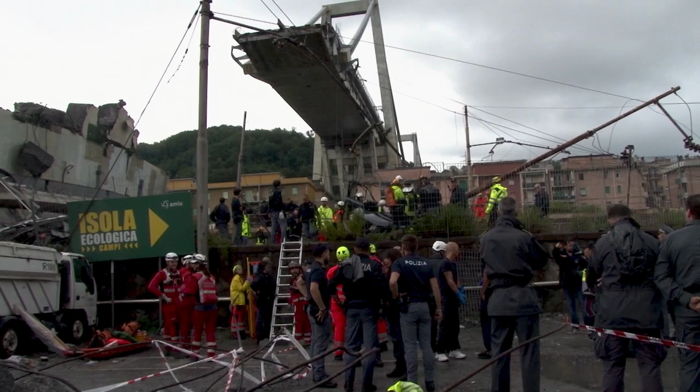It is the worst road disaster in Italy's history. The tragedy has left a deep scar on the nation and on the city of Genoa, despite an incredible feat of engineering that stands both as a monument to the catastrophe and a symbol of pride reborn.

These images capture the last moments of the Morandi Bridge and of 43 people's lives. The brake lights of the vehicles on the bridge tell us there's a stoppage ahead. The traffic draws to a standstill, and the drivers realize what has just happened. The bridge has disappeared. A colossal disaster has occurred.

It was an avoidable tragedy, and that's why it's so painful, because they needn't have died that way. If I think of my nephew and niece, 12 and 14 years old, in the fullness of their lives, it's senseless.

Less than 2 years later, TV crews from all over the world have come to cover the opening of the new bridge over the Polcevera River. The new bridge has a name, Ponte Genova San Giorgio. The highest institutional figures of the Italian state are present, as is Renzo Piano, the bridge's architect.

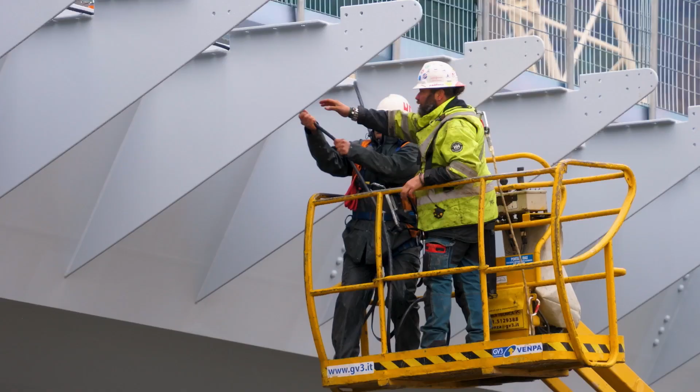The success in building the bridge is a symbol of how things can be done right, with quality, on budget, and above all, on time.

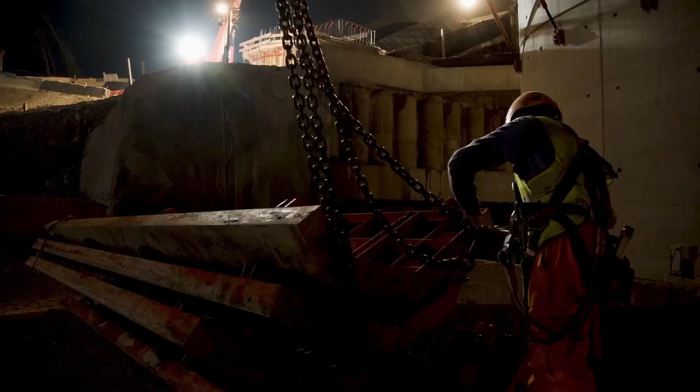This is more than a bridge. It is the symbol of national pride, the sign of the rebirth of a city struck by a massive disaster. The story of fortitude under the most trying conditions.

The new bridge is the nation's response to the disaster. It is the late morning of August the 14th, 2018. A massive rainstorm strikes the coastal motorway, as these images, filmed by a truck driver's phone, show. He is on his way to France.

Gianluca Ardini was delivering furniture in his van. At the wheel, his friend and colleague Luigi Matti Altadonna.

That morning in particular, it was raining hard, I remember. My colleague and I got into my truck to do some deliveries. I worked in a company that sells home furniture, so we start our day of deliveries, and we were at Genoa Center, and to pass, I had to, of course, take Ponte Morandi. On days I did not work, I crossed that bridge twice a day. On the days that I worked, at least 4 or 5 times a day.

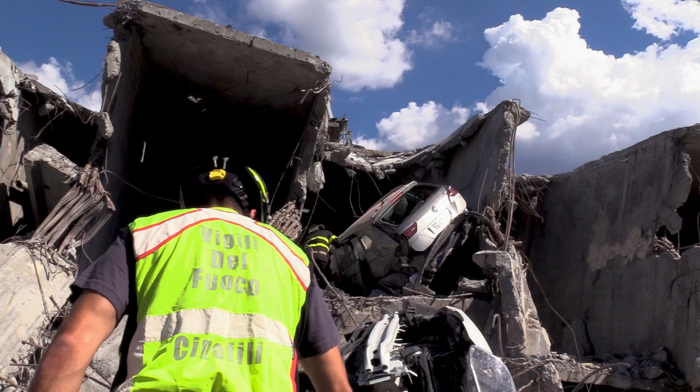Davide Capello survives, miraculously, but is trapped in his car, lodged in an empty space inside the bridge structure. Luigi dies in the cab of his van, and Gianluca Ardini has to wait 4 hours before he can be pulled from the wreckage by the fire brigade.

Richard Bordoni is a member of an urban search and rescue team. He was involved in coordinating the search for survivors amid the collapsed concrete blocks.

We were asked by the first officer in command to send the USAR team to help him. They were already carrying out a lot of rescue operations with all the resources they had. Incoming resources from the local Liguria stations were arriving. So they were doing a fantastic job. They needed extra help, they needed specialized units, and the units were on the way.

I looked at my phone and I saw that my sister Nadia had sent a message on the WhatsApp group of the sisters saying, 'A bridge collapsed, where are you?' Because Claudia was going to the seaside and was to go by there.

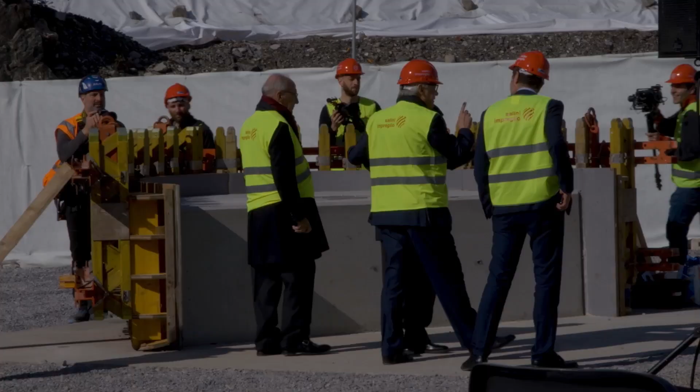I went into the city hall, and here in the next room, at 12:03, I remember the time exactly, we officially opened the emergency committee meeting. That is the committee that handles an emergency every time there's an emergency. That was the official beginning of the emergency, let's say.

The first half hour or 40 minutes, I admit there was panic and we didn't understand what had really happened. Communications were difficult. The mayor has a duty, and this may seem a little cynical, but it is the reality—we need to think about the rest of the city.

Those involved fell off a bridge and fell between 40 and 50 meters. It was a huge drop. So the cars crashed to the riverbed or on top of other buildings, or were crushed by huge blocks of concrete, so that was the major cause of death.

Egle Possetti is the sister of Claudia, who died together with her husband Andrea and her children Manuele and Camilla. Egle is the coordinator of the Victims' Families Association. She goes to Genoa with her sister and a friend to find out what happened.

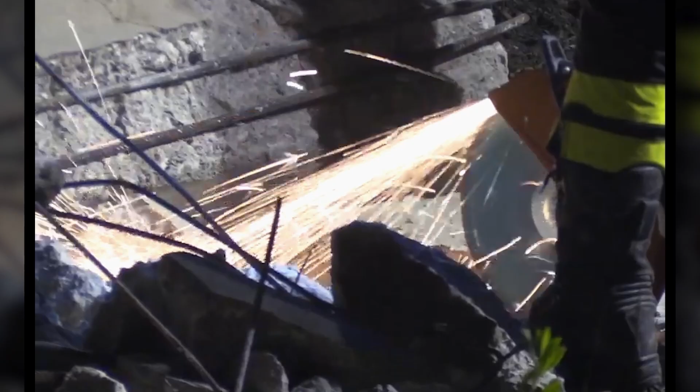Hundreds of families have to abandon their homes. Italy no longer has access to its main port, and Genoa is cut off from Western Europe.

We started on Tuesday the 14th, and it was Saturday morning when we found the last deceased person, and we were sure, 100% sure, that nobody else was involved in the collapse.

Giusy Moretti is one of the hundreds of people who used to live in the shadow of the bridge.

Some people went to acquaintances, others to hotels, others to apartments given by the city.

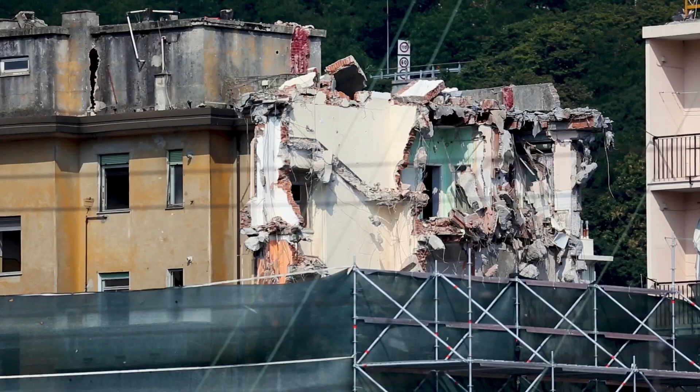But in the apartments donated by the city, there were no kitchens, so people couldn't cook. So we started a canteen that we kept going till the end of the year, until December, more or less. There were meals coordinated by numbers of people who came during the day and others in the evening.

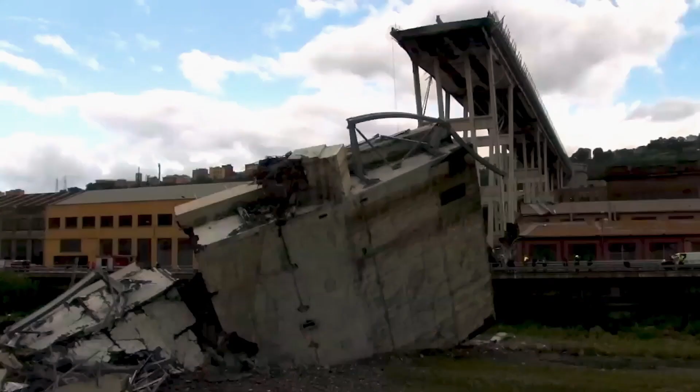The city of Genoa connects Italy to the whole of the Mediterranean and the whole of northwestern Europe, thanks to its two ports. The collapse of the Morandi Bridge not only shocked the nation and killed 43 people, but also blocked road communications across this vital transit infrastructure.

It cut Genoa in two and blocked communications with France and the rest of northern Europe. The tragedy is also a financial disaster for the city of Genoa and for the region of Liguria, with its stunning coastline and tourist attractions such as Portofino and Cinque Terre, visited by millions of tourists every year.

At 2:30 we had the first press conference with the journalists, and the atmosphere was very tense. You could cut the tension with a knife. And I said a very important phrase, that Genoa had not been brought to its knees.

This is an absolutely vital phrase, because the change in the human mind that comes out of a tragedy immediately wants to fix things and put things right, change the system. Why? Because, like all tragedies, this can become an opportunity for improvement.

So from that moment on, we immediately rolled up our sleeves and said, 'Come on, guys, here we can do better. Here we can do something big.'

The whole area along the Polcevera River, over which the Morandi Bridge once stood, has to be reorganized. The area is occupied not only by homes and by the riverbed, but also by one of the major railway lines into one of Genoa's stations.

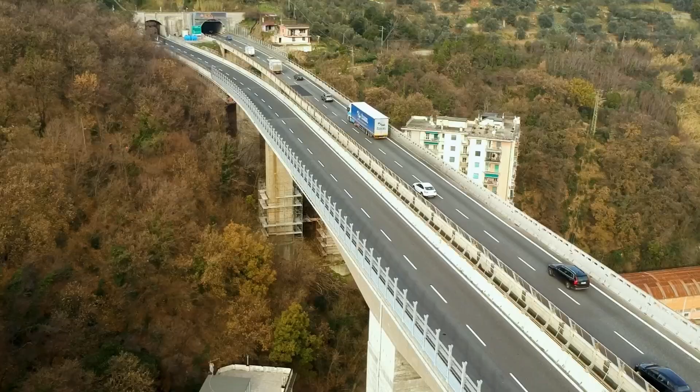The city of Genoa is boxed in by the sea and the mountains, so the area available to road bridges is limited. The new bridge will have to be built where the old one collapsed.

News of the tragedy reached the studio of architect Renzo Piano in Paris. It was a terrible tragedy, and still today I cannot get rid of the impact of that terrible moment of August 14th of last year.

We talked the next day, on the 15th. He called me up straight away, and we exchanged comments about the tragedy of it all. And then I said to him, 'Why don't you think about building the bridge?' So he started thinking about it, and then he made this incredible gift to Genoa.

The Morandi Bridge was built in the 1960s. These images from the time show the laying of the concrete.

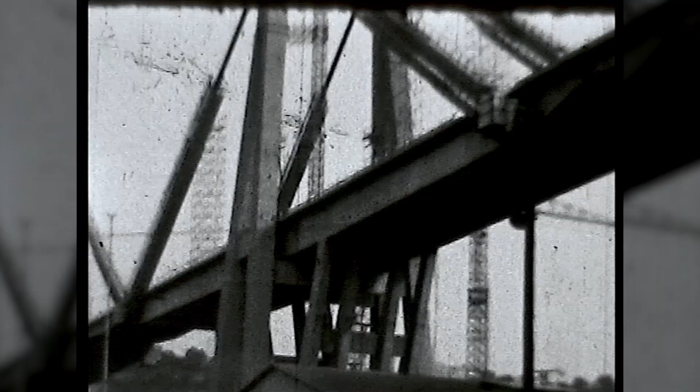Reinforced concrete, with its steel skeleton, was considered at the time the safest of all construction materials. Time would prove that this was not always the case.

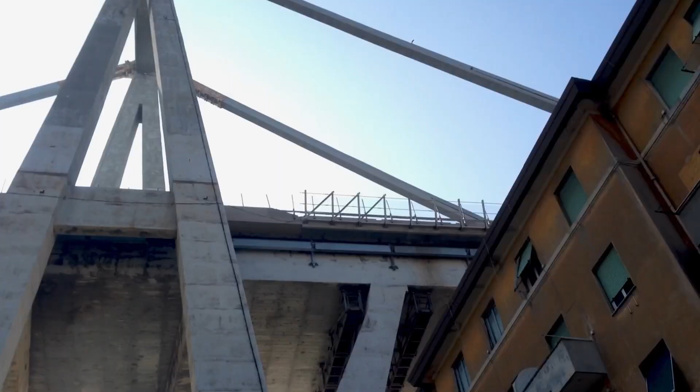The bridge over the Polcevera River was designed so that the thick steel cables held up the road with a fan-shaped support structure attached to massive concrete towers. The support cables were covered in concrete to protect them from corrosion.

The bridge was inspected in the 1990s, and the result of the survey was worrying.

Water had infiltrated the concrete coverings of the support cables on the easternmost span of the bridge, and had corroded the cables at the joint to the concrete tower.

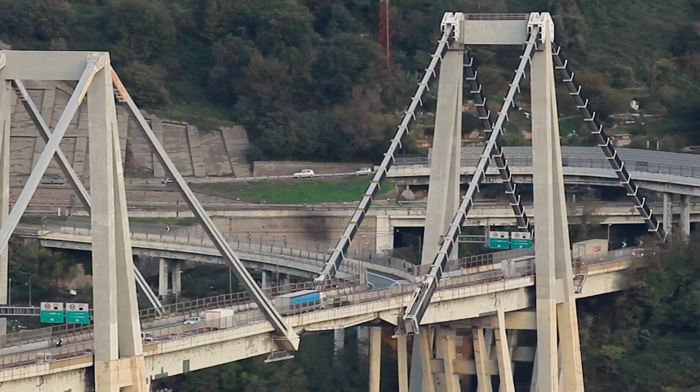As a result, the easternmost cables were replaced, but in 1999, the motorway system was privatized, and the new company, Autostrade per l'Italia, made no further repairs to the bridge, despite knowing the state of the cables.

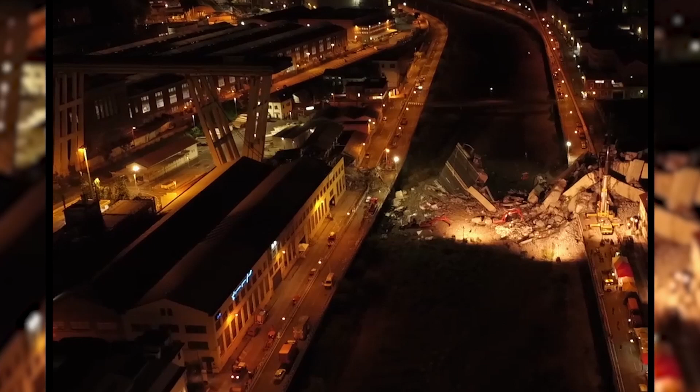Essential work on replacing the cables was planned for October 2018, two months after the bridge actually collapsed. The Morandi Bridge had become a symbol of the city of Genoa, so much so that the Genoese called it their own Brooklyn Bridge. But little did they know, it was literally rotting from within.

This is the story of the rebirth of Genoa after one of the worst infrastructure catastrophes of all time.

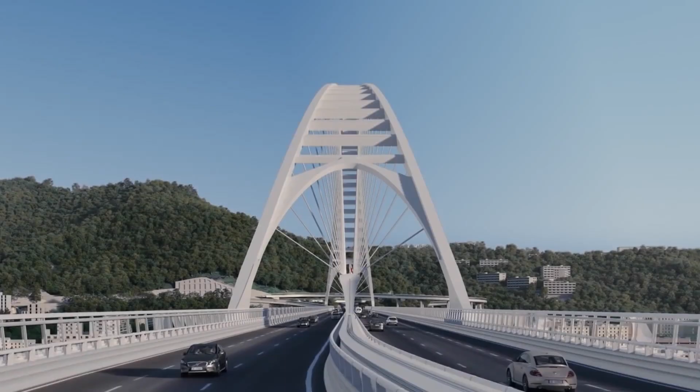Two projects were shortlisted for the bridge. A design by Santiago Calatrava was considered, but eventually, of the two finalists, the Renzo Piano design was chosen. That came together as Per Genova.

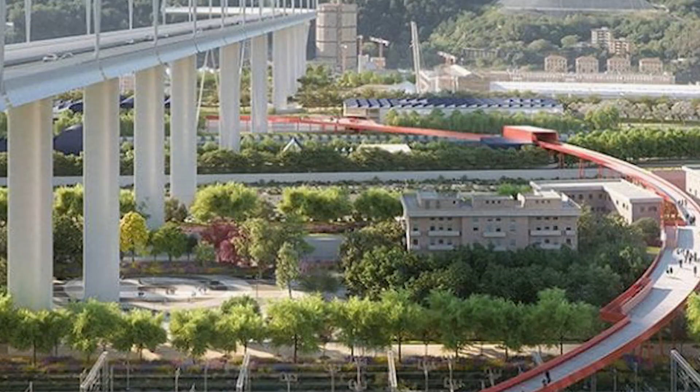The winning project also involved turning a large swathe of the land under the bridge into an innovative park and green space for the city. The decision-making process was smoothed over and hastened by an unusual collaboration between region and city administrations.

Francesco Poma is the project manager of the Per Genova consortium and delivered the dossier.

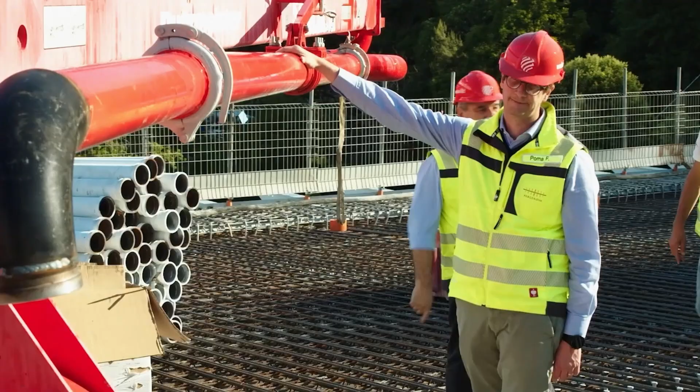It was a very busy period between the expression of interest, which I believe was mid-November, when we had to prepare the concept based on architect Renzo Piano's idea in little less than two weeks. The moment in December we knew we'd won this work, we immediately put a great team to work to put together an operational plan.

A plan to build the bridge that first and foremost had to respect timings for completion. But it was not the only challenge. We also wanted to raise the level of quality of the work and guarantee the beauty of the project, in order to respect the architectural plan of Renzo Piano, who accompanied us through the entire development of the project.

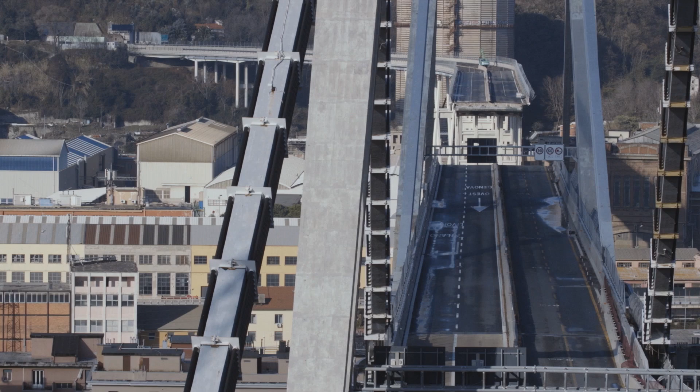The initial traffic detours to keep the port running were a temporary fix. A new viaduct was built to give trucks from the western port and the airport access to the motorway. The Italian government knew it had to move quickly. By December 2018, bidding was closed on demolition of the old bridge and construction of the new one.

Stefano Mosconi is the site manager and was there from day one, as the very first foundations for the new piles were laid.

When I arrived in Genoa in January, towards the end of January 2019, when we began working on the design of the new Polcevera Bridge, the old Morandi Bridge wasn't demolished yet, except for the central part that had collapsed. So it was quite shocking to see this great work of engineering wounded, broken in its central spans.

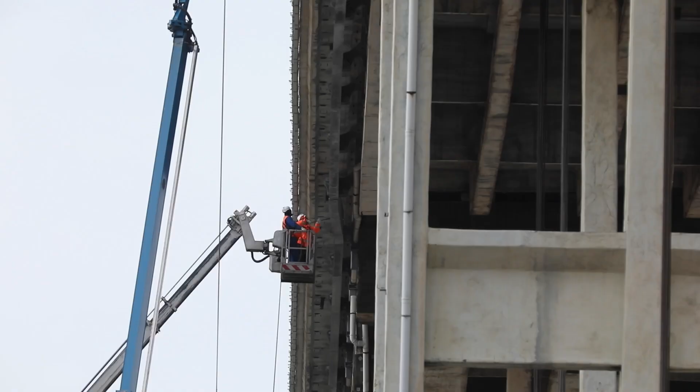Demolishing the old bridge became a priority, but posed certain problems. While the spans could be cut and slowly lowered using strand jacks, the massive pylons would take months to dismantle. On inspection, the concrete was found to contain natural asbestos, so an explosion was initially ruled out to avoid the dust settling on the surrounding homes.

The delay threatened to hinder the reopening of the new bridge for many months. There was a complex but feasible solution: use water to dampen down the dust. In these images, we see tests of the behavior of massive quantities of water blown into the air, used to calculate the time it would take for that quantity of water to intercept the dust from the explosion.

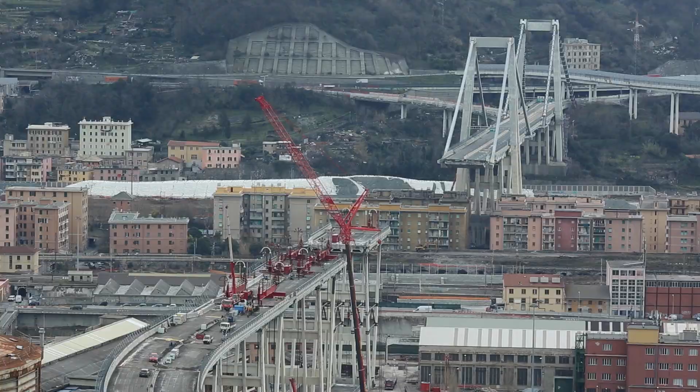Another complication was the connection of the eastern stays with the mountain. The inertia caused by the explosion threatened a landslide. Once the calculations were carried out, the engineers laid massive basins of water along the bridge, primed with explosives, while smaller charges were placed in the concrete of the eastern stays.

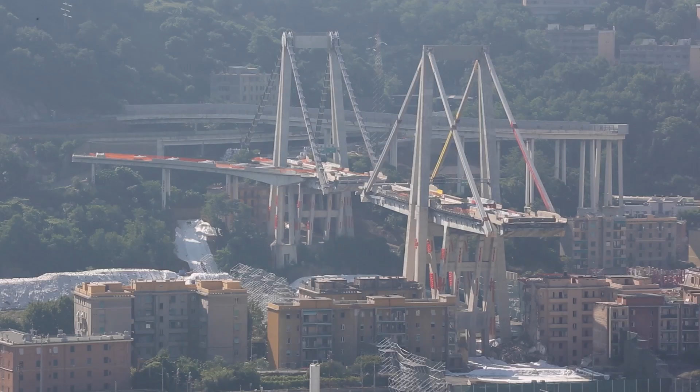The day for the explosion came on the 28th of June 2019. Ten months after the deadly collapse of the Morandi Bridge, what was left of the old bridge was spectacularly blown up.

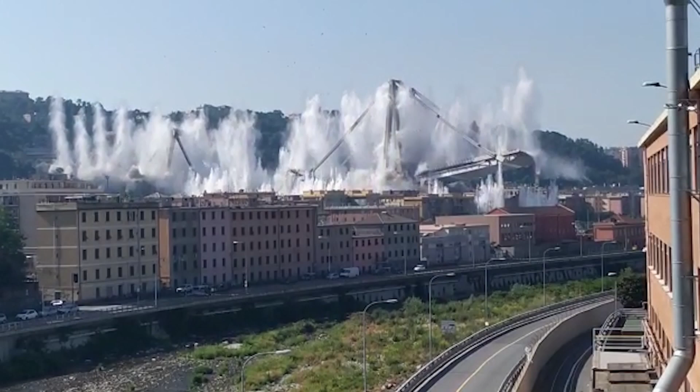The long-standing communities that the bridge had been built over were forced to disperse, adding a new layer of tragedy upon tragedy. For the families of the 43 victims, it was an important milestone.

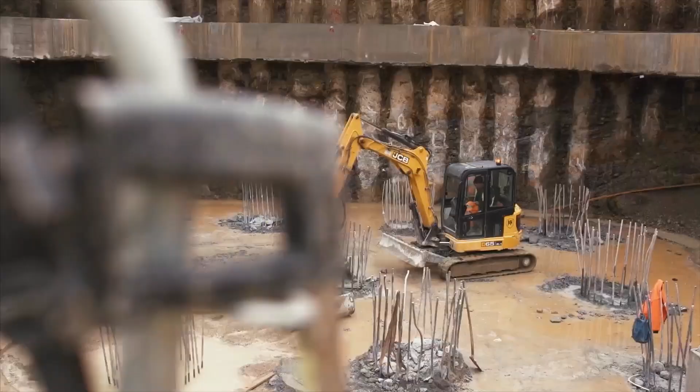In the meantime, the engineering of the new bridge continued, and work began on the foundations. Engineer Roberto Carpaneto is the head of RINA, Italy's foremost ship and construction engineering verification company, which was tasked with overseeing the whole project.

Construction began on the 15th of April, so we had parallel work going on at the same time, work related to construction as well as work related to demolition. Managing the safety and scheduling of these phases was a very interesting process.

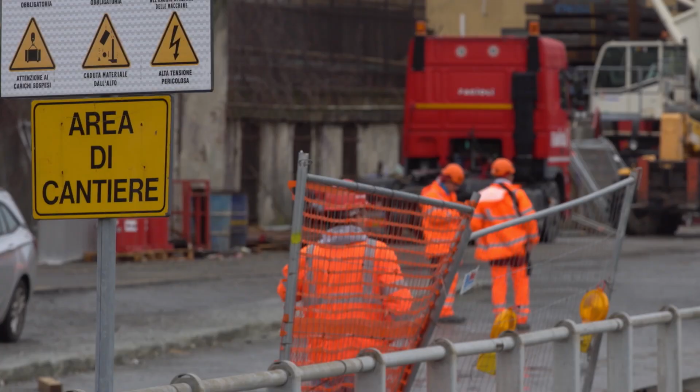I am just one member of a team of 1,000 people who are working. Above all, I respect the workers, because building this thing is complicated and difficult.

The concept of the bridge was a single beam of steel that stretched all the way from the western to the eastern end of the valley, exactly where the Morandi Bridge had been. The steel structure was to be lifted to the top of the piers in segments that had been assembled on the construction site, and these were then welded together once in position to provide a central core that carries most of the weight.

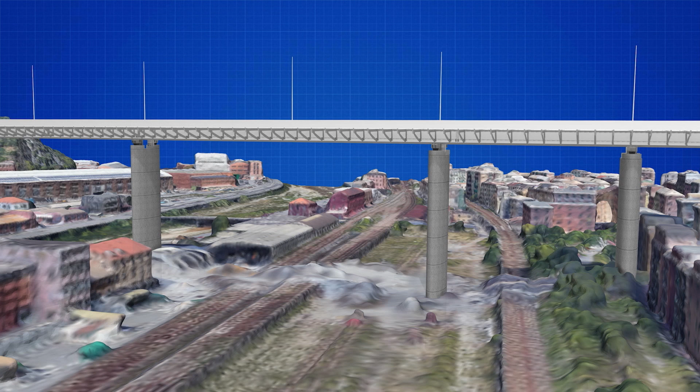While the weight of traffic on either side of the road is dispersed downwards and around the hull-shaped structure towards the core, that spreads it along its whole length and onto the reinforced concrete piers and down into the foundation piles.

It's a simple bridge, but you see, this word is misused, because when you say simple, people think banal. Everyone knows that simplicity is very difficult to achieve. The bridge is like the hull of a great ship that crosses the valley. And this isn't just a metaphor, because it's being built by a shipbuilding company.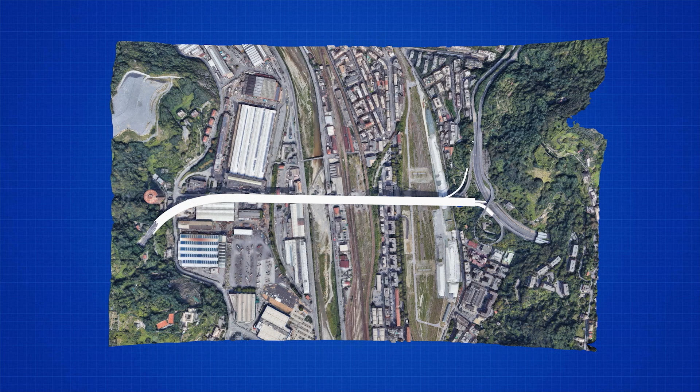The bridge, designed by Renzo Piano, is 1,067 meters long, with 16 spans of 50 meters and 3 spans of 100 meters, resting on 18 elliptical concrete columns. The steel skeleton of the bridge is connected structurally to the outer paneling in steel, shaped to resemble the hull of a ship. The fundamental materials for the new bridge are concrete and steel.

Nicola Meistro is the managing director of the Per Genova consortium.

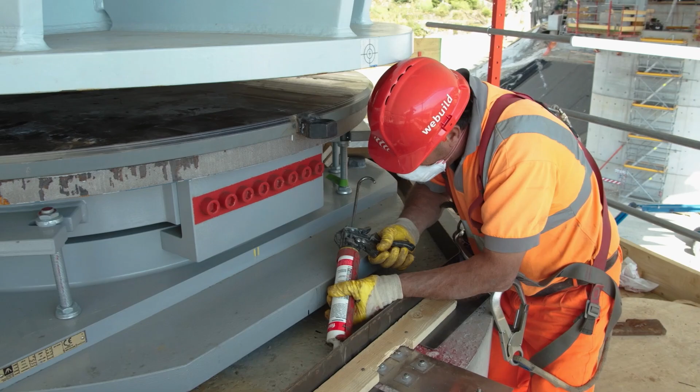The bridge is just over a kilometre long. There are 18 elliptical piers that are 40 to 45 metres long. We dug 80,000 cubic metres in an area that was very built up, and we used 67,000 cubic metres of concrete, reinforced with 8,000 tons of steel.

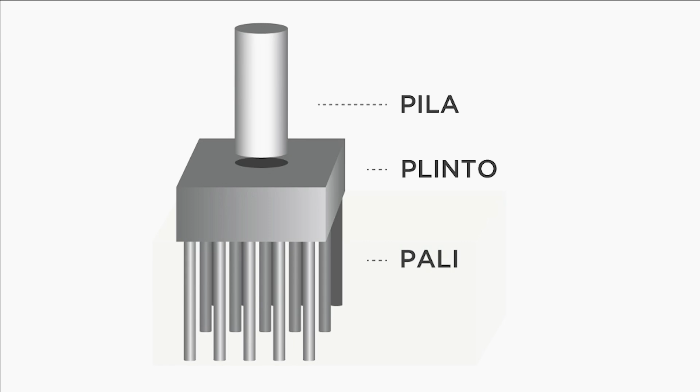The base of each concrete pier consists of 16 reinforced concrete columns that penetrate 50 meters downwards into the terrain and are surrounded by a concrete cube to ensure static stability. Each pier then rises 41 meters upwards to hold up the deck, made of a hull-shaped steel structure that runs the whole length of the bridge, on which a reinforced concrete surface is laid.

We began with Pier 6. The first pile was dug on April 16th of 2019 for Pier 6, and we were on a tiny island of land in the middle of the demolition site of the bridge. It was the absolute minimum space necessary and sufficient to make the first set of piles around the plinth of Pier 6. We cleared the area with a deep excavation, filled up the hole, made it even with the ground, and then started to drill the piles down.

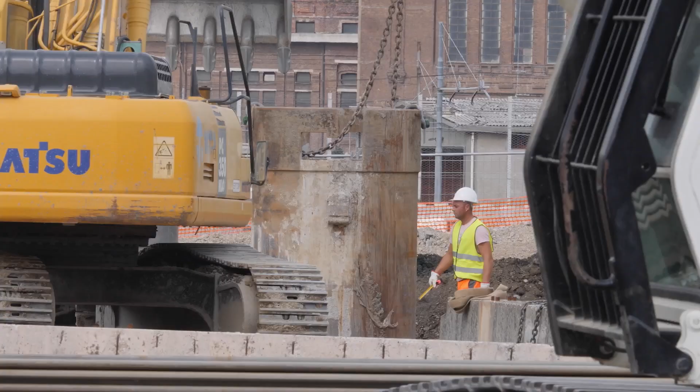The plan was the most ambitious ever, working day and night, 24/7, with just one break for Christmas. Workers and engineers were pulling off an engineering miracle.

Decisions were made to utilize special equipment. For example, we were using 6 machines at the same time to create foundations, and 6 climbing formworks to construct the piers.

Keep in mind that this is an operation that, aside from the night of Christmas, never stopped. All other national holidays were honored by working on the construction site. As soon as an area was freed of the rubble of demolition, we had a machine ready there to work 24/7 on the construction of the piles. We had up to 6 working simultaneously on 18 different sub-foundations.

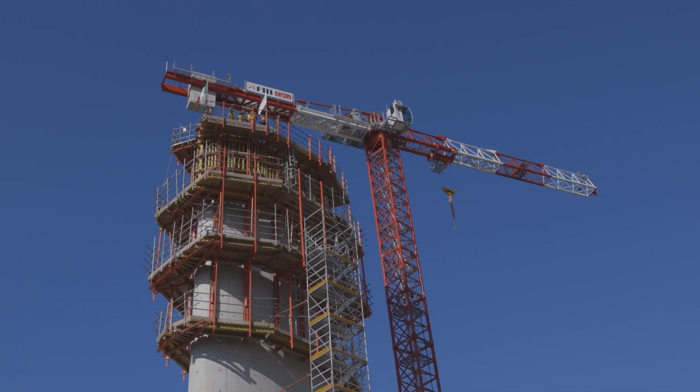Every 4.5 meter segment had a production cycle of between 48 and 72 hours, so 2 or 3 days to raise the formwork, reinforce, close, inject the concrete, allow it to harden, open it, and then remount at the next level.

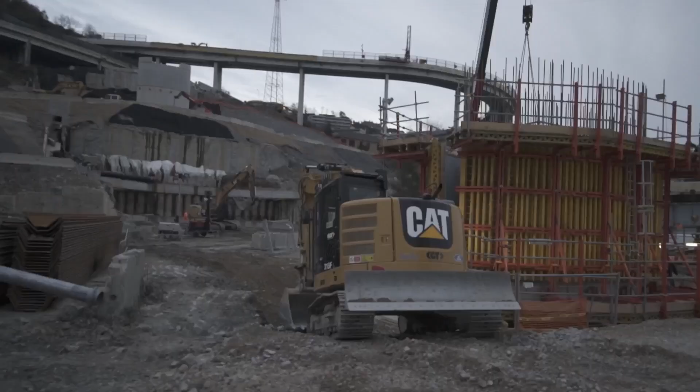These are the wooden climbing formworks used to construct each segment of each pier. Once each reinforced concrete segment has been finished, the mold is moved upwards and filled again. This operation is repeated not only dozens of times vertically for every pier, but to save time, also all along the worksite, to provide support for what eventually will be the bridge.

The concrete used in the piers is different from the concrete used in the plinths, and different again from the concrete used in the piles. It is particularly effective from a mechanical point of view, so strength and class of consistency, but is also technically advanced as far as the final aesthetic aspect.

Management of the whole production line, from the quarry to the laying of the final product, is extremely advanced today, and in this case is particularly curated.

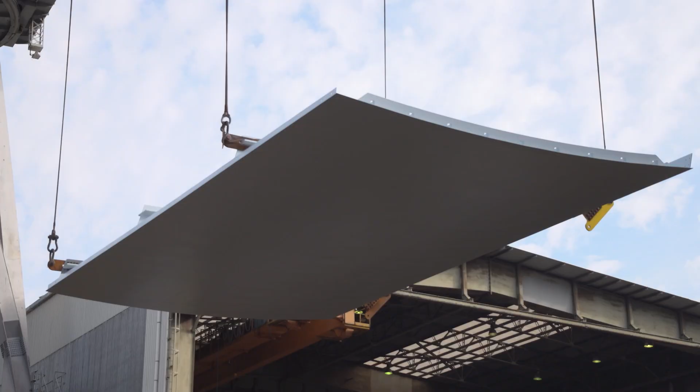The other key material in building the bridge is the steel. This is put together off-site, in the Fincantieri construction sites dotted across Italy.

As construction continued after freeing up the valley of rubble from the bridge, victims' families and evacuees protested. The tragedy was not forgotten. Egle Possetti is the coordinator of the Victims' Families Association.

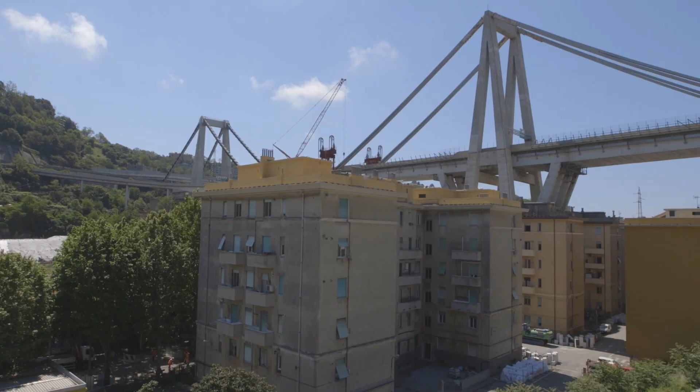My daughters were born in that house. I was living there when I got married. One of my daughters got married when she was living there. My father died, my mum died there. Great moments, sad moments, all connected to the walls themselves. It's difficult to explain.

Both my daughters are psychologists, and they say that we can only speak about it among ourselves. Because however much sympathy you get from other people, only those who actually lived or are living the experience can really understand.

50 years later, in order to remove what was left of the bridge, these homes had to be demolished. The owners were compensated, but allowed to take only a few items with them.

I went to get mementos. My daughter went to get winter clothing. We went for different things, also because we ran away with what we were wearing - flip-flops, summer tank tops, summer clothes. So my daughter concentrated on getting clothes and other stuff, while I went to get photographs - photographs of my daughters as children, pictures that haven't been saved on a phone, that I'd never be able to get back. Memories, slices of life.

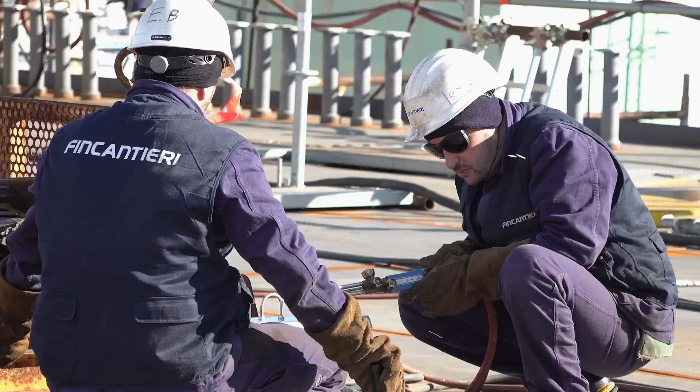The new bridge was taking shape all around Italy. Fincantieri moved 24,000 metric tons of steel from 3 production sites: Castellammare di Stabia, Valeggio sul Mincio, and Sestri Ponente, where the spans of the bridge are welded together to form the characteristic hull-shaped base of the roadway.

Engineer Ciro Dalzotto managed the construction of the steel spans and their assembly on site. Every steel panel is made up of 3 sheets welded together, cut and welded together again, to make a single large panel of the required dimensions. In the case of the long span of 100 meters, these single sheets of steel are given a curved shape using a large press that gives them that hull shape.

The parts built here at the Valeggio works are welded together to create load-bearing elements of the bridge.

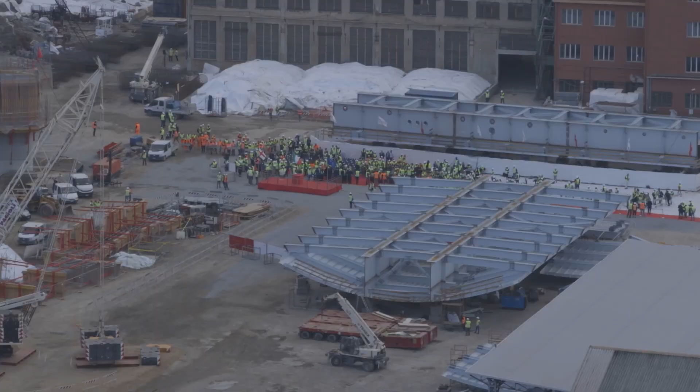Over time, these elements were shipped to the Genoa port, and using special transports, they were brought to the construction site where, one by one, we allocated special assembly areas where the elements could be finished, while the pier was still being built.

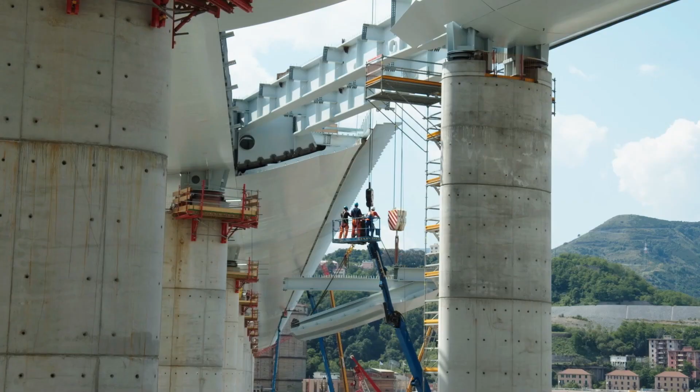There are special elements, the plinths, specially designed and very wide. They're attached to the pier at the bottom and to the bridge at the top, but they're built so as to allow the bridge to dilate.

Remember that the bridge is 1,067 meters long, welded along its entire length, and it expands by tens of centimeters as the temperature changes.

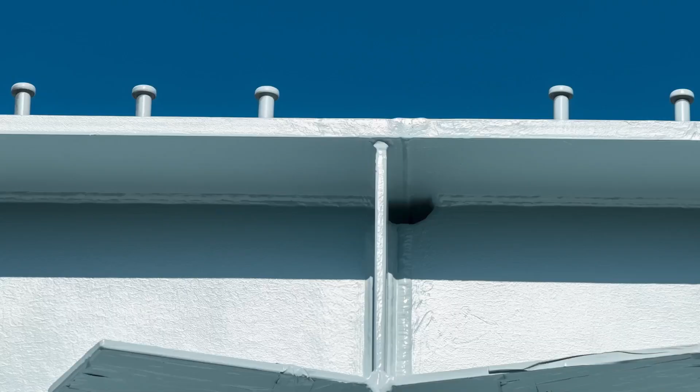The steel structure also has to host a concrete foundation for the tarmac road surface. This stability is provided by thousands of Nelson-type studs, or shear bolts, that keep the concrete fixed to its bed.

Concrete works through compression, so is ideal for absorbing certain forces, while steel works both under traction and compression. But to ensure the proper interface between these two elements, we use Nelson-type studs. They are welded to the beams in the workshop, and they guarantee that these two elements work together in the best possible way.

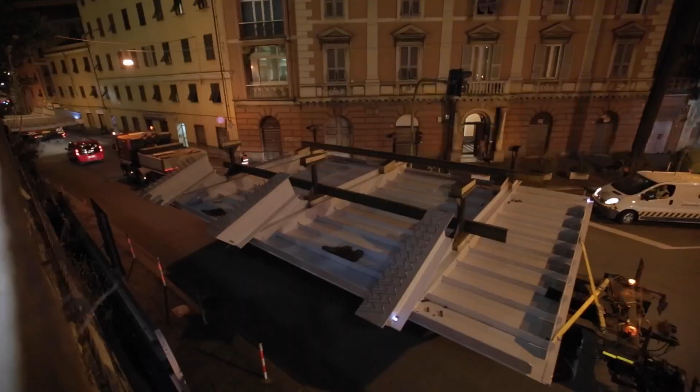One by one, the huge steel decks were transported to Genoa's western port and then carried by night to the worksite by 50-metre-long SPMTs, self-propelled modular transporters, and then positioned between the two piers to be assembled. The size of the steel components made maneuvering the SPMTs around existing buildings difficult, and some buildings along the way had to have hard corners removed to allow the convoys to get around them.

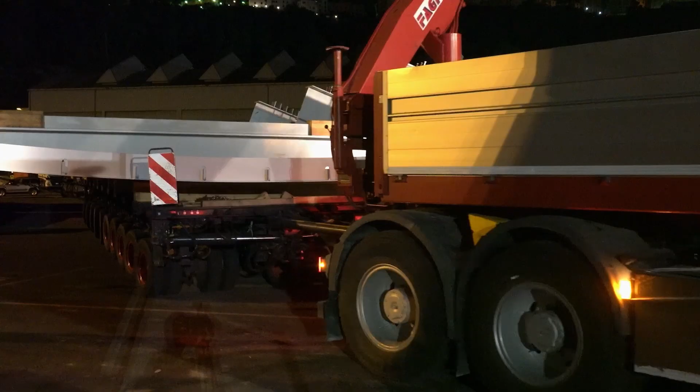Unexpectedly, however, this massive engineering project is about to encounter almost insurmountable obstacles.

We had several critical moments. In October and November, we had the most rainy season of the last 60 years in the Liguria region. So working outdoors, while we were in the process of building the piers, that slowed us down quite a lot. We also had two big floods that infiltrated our construction site, with damage to the construction equipment.

We had a big problem, let's say in autumn, when the construction site was flooded, and then the big problem of heavy seas that stopped the barges bringing materials, that is, the steel sheets from Castellammare di Stabia to Genoa. I remember that one of the barges had to take shelter in the lee of Elba for 10 days, for example. So the delay in delivering the pieces led to a delay in construction, and all these delays had to be managed and fixed.

On New Year's Day, there was a fire on Pier 13, on the formwork of Pier 13, due to operational inefficiency, and that led to a fire that reached the wooden formwork. For me, I always say this was the most critical moment. So we had this accident, but here too, this led to a technical reaction, a reaction in operations, because within 20 days of the whole accident, we fixed it, and we started where we left off.

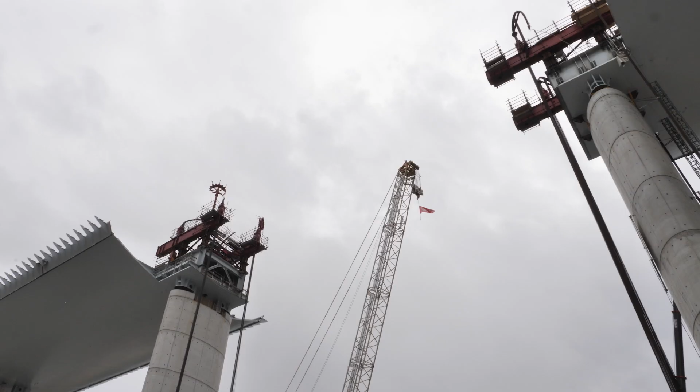On the 9th of March 2020, the Italian Prime Minister announces a national lockdown, excluding essential services. Although the Genoa Bridge is considered a strategic project, new rules are introduced to protect workers' health.

The virus takes the life of producer and cameraman Paolo Micai, who shot many of the spectacular images in this film.

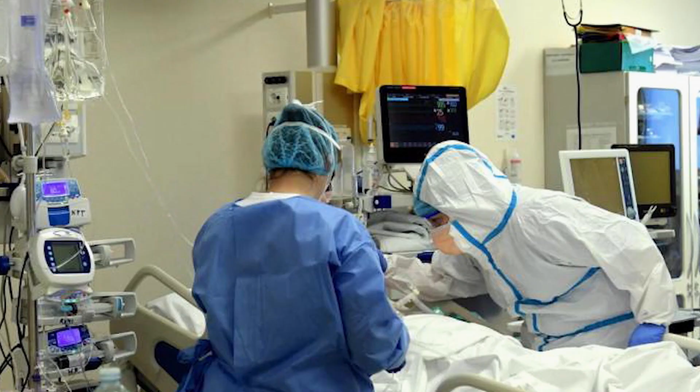Italian society as a whole is put under immense pressure, not only by the health crisis, but also economically, just as one of the nation's most ambitious construction projects is reaching its climax.

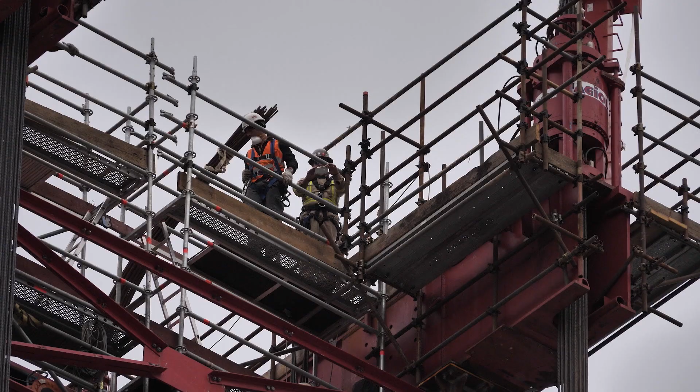Without stopping the construction site. When COVID started to be a problem, and I followed many other construction sites, the behaviors I witnessed and the determination the workers showed in those difficult and uncertain times, I noticed that the workers had no intention of pulling back. They may have been afraid, but they all went ahead, and I'd like to thank them for that.

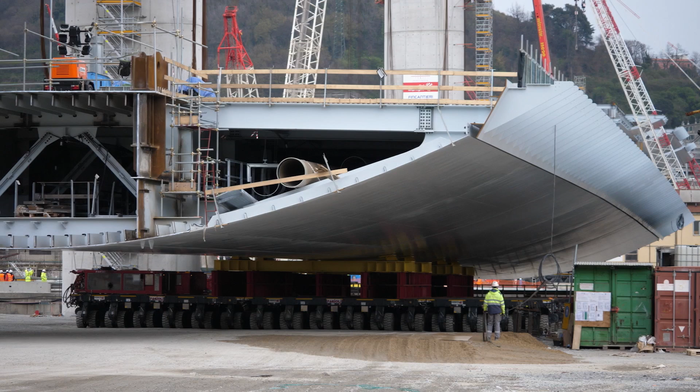On the 10th of March, 2020, the first 100-meter maxi steel deck is raised. It weighs 2,000 tons.

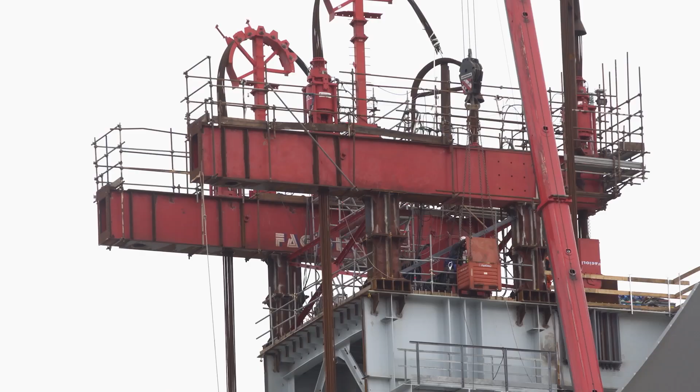While the other 50-meter spans could be raised with maxi cranes, the giant decks require the use of jack-up systems and strand jacks.

The central span over the river is lifted and slowly moved into position with remote-controlled trolleys, called SPMTs, onto a jack-up tower located on an artificial platform of gravel built into the riverbed, before being attached to strand jacks that raise it to the top of the central piers.

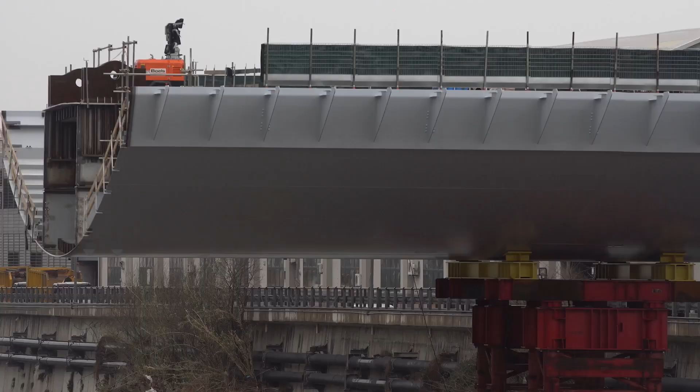Raising it is a delicate, precise operation, moving just 5 meters per hour.

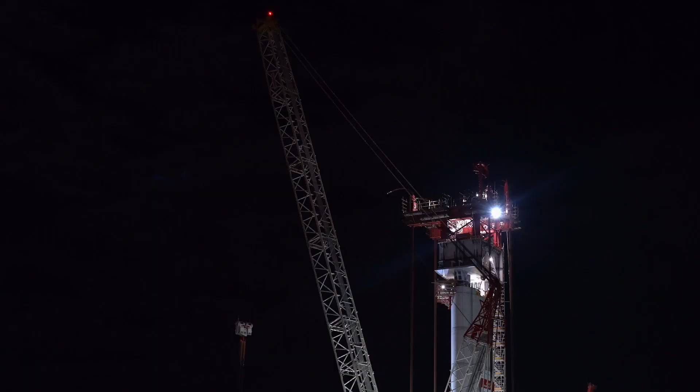And silence is key. Operators have to be able to hear every small noise, every adjustment of the deck, as it is slowly, millimeter by millimeter, lifted into position.

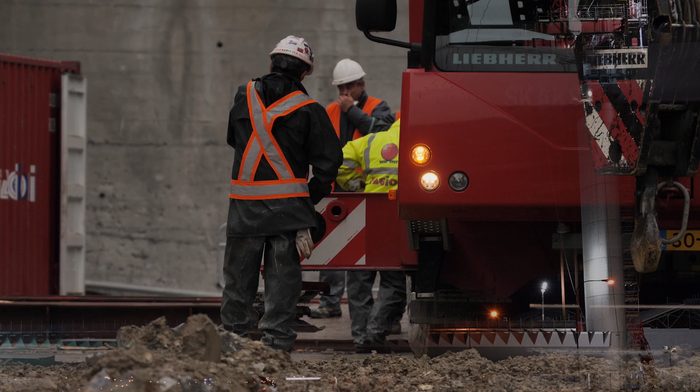Construction on the bridge goes forward even as the pandemic is worsening across northern Italy, with ambulances racing through the cities and hospitals filling with patients.

We applied ownership, as you say in English, the skin in the game. Everyone involved has to put their face on the project, as we say in Italy. And that means taking responsibility for decisions. Say things loud and clear, say things publicly, and face the consequences if things don't get done. This is a very driving factor to reach the objective.

What is happening on that construction site is extraordinary. And this often happens on construction sites. Construction sites are places of enthusiasm, of solidarity. Divisions disappear on construction sites. Pride wins through, pride in doing something all together.

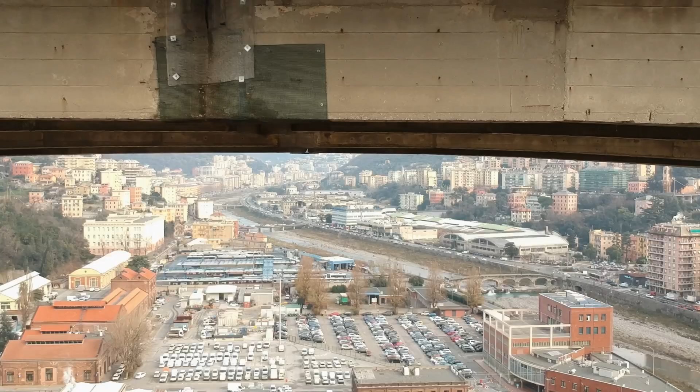While the builders handle the COVID emergency brilliantly, the original tragedy that set in motion the building process remains unresolved. The investigation is getting into full swing. The bridge collapse not only still has no official cause or culprit, but seems not to have brought about a radical change in ownership of the decrepit motorway system.

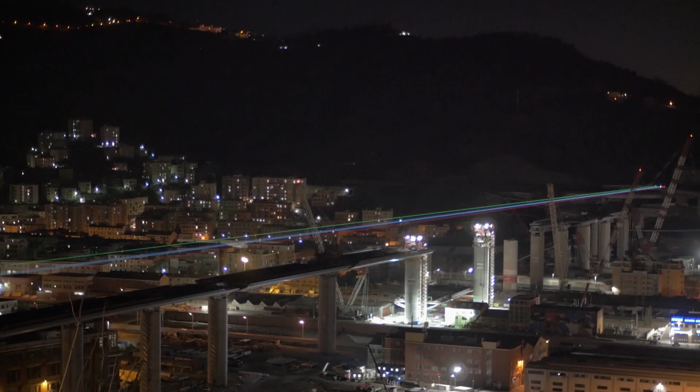The bridge is designed to carry 60,000 vehicles a day and is equipped with over 200 weight and vibration sensors.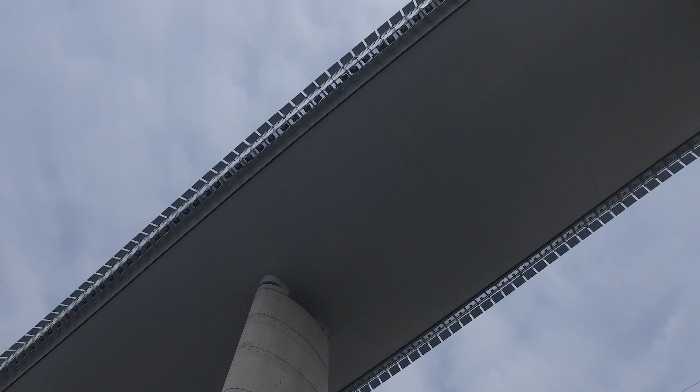The shape of this bridge, aside from the structural benefits, allows it to be completely inspected. We did all the checks and tests, and this bridge will be under constant monitoring, which will allow us to monitor in real time the stresses and fatigue on the bridge, and in this way to plan maintenance proactively, anticipating any problems the bridge itself might have.

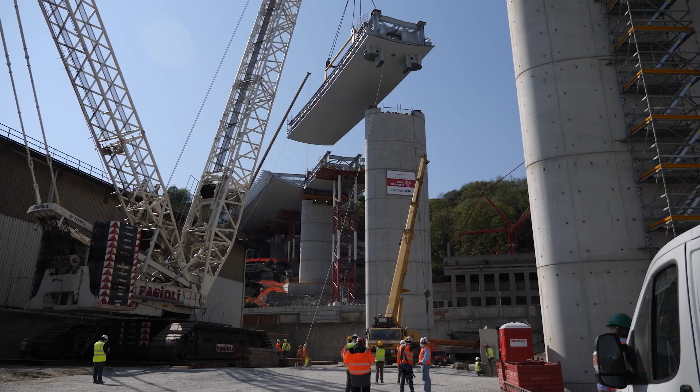Down on the worksite, every effort is made to complete the bridge on time, although work is slower and more complicated than before.

On the 28th of April 2020, the last steel span is lifted.

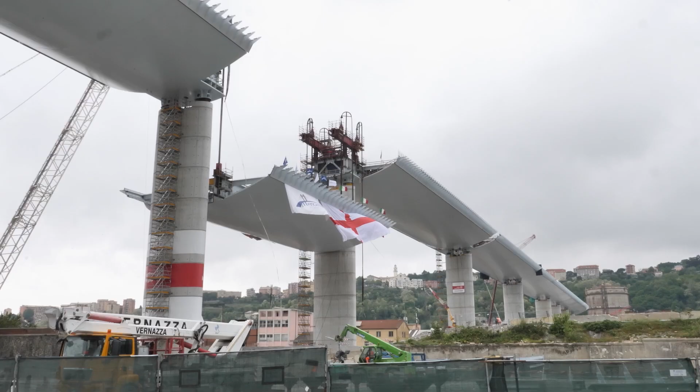In an extremely delicate moment for Italy, the bridge represents a resurrection. It is a light in the darkness. Once the last span is in place, the bridge is lit up in the colors of the Italian flag to celebrate success. The new bridge represents a better future, and now, more than ever, construction has to proceed as fast as possible.

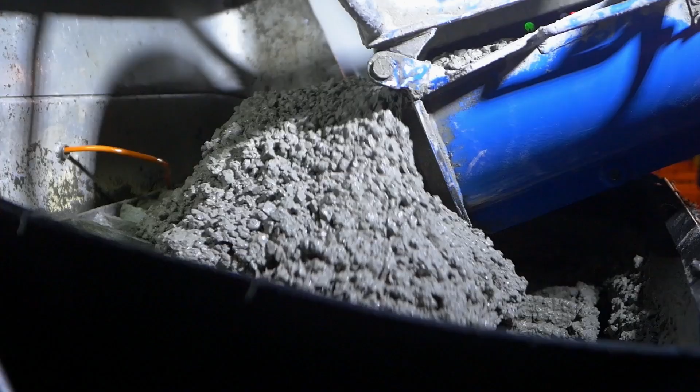Right now, in these days, we are laying the concrete base above the steel structure, and there is approximately 9,000 cubic meters of concrete that form the single base. And then all that is missing is the tarmac, then all the ancillary equipment, the guardrails, before proceeding to the opening. We are almost finished.

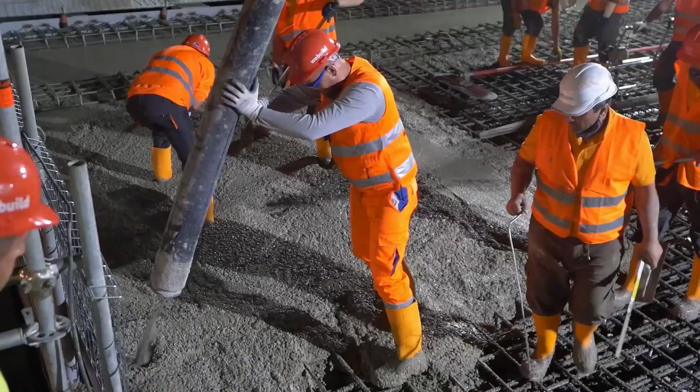The tarmac is laid in July, while at the same time the ancillary equipment, such as the glass walls, the solar panels providing power for the sensors, and the 43 lights are installed. Each of these items has been designed and built solely for the new bridge. By the end of July, the bridge is ready for testing. The concrete base of the tarmac road has been laid, and most of the safety infrastructures have been installed.

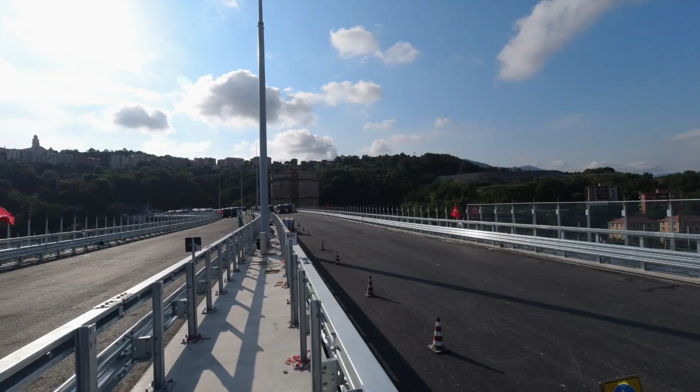56 44-ton trucks are driven across the bridge in a spectacular display of confidence. And as they pass, the sensors installed on the bridge send their data on vibrations and pressures back to the control station. The bridge passes the test.

It is a bridge that, despite all of this, is quite light, because the metal structure allows for better performance from the point of view of weight capacity compared to a concrete one. It is a lighter bridge, not just at first glance, but also on the scale, than the one that was here before.

Construction, the technique of project management, the technique of the steel, the piers technique, these are all important and state-of-the-art as far as technology is concerned. But there is also the project management, how you plan a project day by day, because there are always variations. And with these variations, how do we manage them so as to recover time?

In the park below, designed by Milan architect Stefano Boeri, a solemn memorial provides a quiet, restful place for residents to reflect and remember.

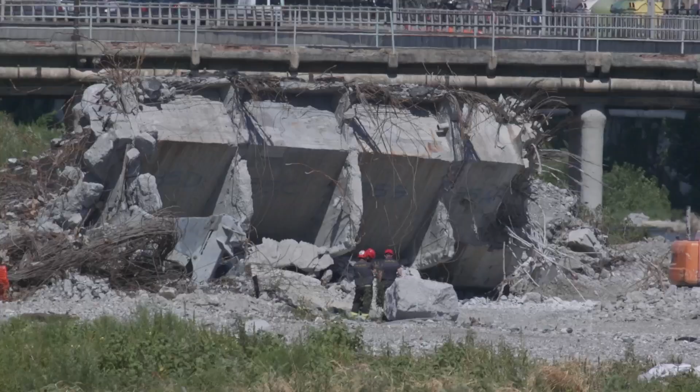Under the new bridge will be a circle of 43 trees, designed by architect Boeri, one for each victim. None of them have a name attached so that everyone can see their own relative in any tree. What we see today is temporary, and when the park under the bridge is complete, they will be planted in a circle in the earth. Certainly the monument will include part of the bridge, because we immediately asked for part of the old bridge to be kept, because we don't want anyone to forget what state this infrastructure was in.

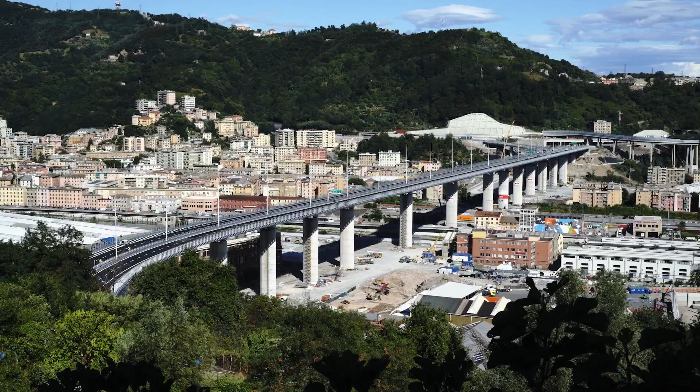The design of the bridge is symbolic. The hull shape is a clear reference to Genoa's maritime traditions, and the elliptical section of the piers gives it lightness and elegance.

It is a bridge that reflects the character of Genoa. It is a bridge that takes small steps. All these piers, many piers, there are 18 piers. At the beginning, everyone said they were too many, but no. You just have to go and see it today, and it gives you an impression of incredible lightness. The bridge, one step at a time, reaches its objective. Never overstep the mark, and in the end, you get to where you want to be.

Then, it also has the shape of the hull of a ship. The steel bridge is the hull of a ship. Nobody believed it at first, but it's true. You just have to go and see it. It's a ship that is suspended on piers, crossing the Polcevera River, a great sight to see.

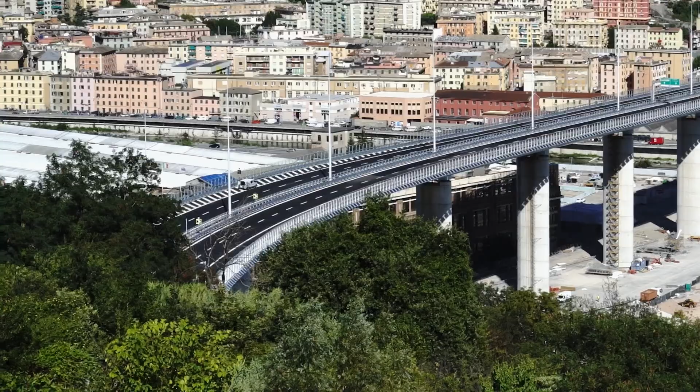It is a miraculous piece of work, and I'd like to say something. This country, Italy, which is also my country, even though it is many years that I am abroad, is an extraordinary country that has this capacity, but it's a pity that every time it seems you need an emergency, every time you need a tragedy.

Renzo Piano, the architect of the bridge, has never lost sight of the origins of his new creation.

He was very delicate in what he said, as he is the designer of the bridge. This is his bridge. However, he has always respected the tragedy because we can never forget where this bridge came from, a shameful tragedy. So obviously the delicacy with which the architect spoke about the new bridge, also during the opening ceremony, was much appreciated by us all.

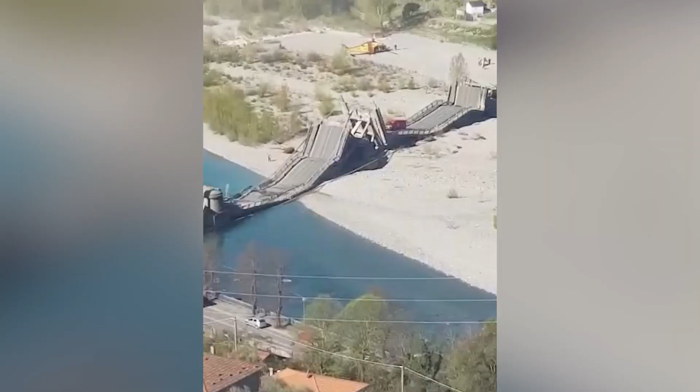Two more stretches of roadway would dramatically collapse in the months following the Morandi Bridge disaster: a viaduct linking Liguria and Tuscany, as well as a 30-meter section of another aging viaduct on the A6 motorway toward Turin. More than 200 tunnels do not comply with European standards, and there are at least 1,000 viaducts which have not been inspected in years. But even when they are checked, they don't necessarily get repaired.

We expect a strong and clear decision from the political world, and we've said this time and time again. I understand that this could be a risk, but justice has to be our flag. What happened is too serious for things to stay as they are. So the trial and this are two determining aspects for us, and of course we'll follow the trial with all the attention necessary.

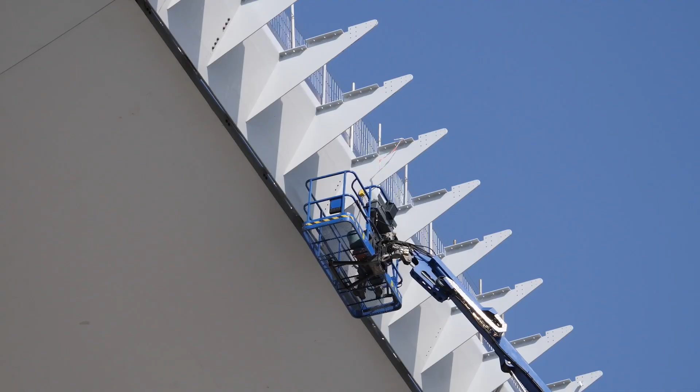This bridge was built by Italians, by Italian companies, very capable, and it is extraordinary. There are incredible things in this bridge that I didn't do, or at most I contributed to them. There are the robots that continually monitor the state of the bridge. There is very advanced technology in the construction and maintenance, and in the promise that it can last and be loved for 1,000 years. These things are things that our country knows how to do.

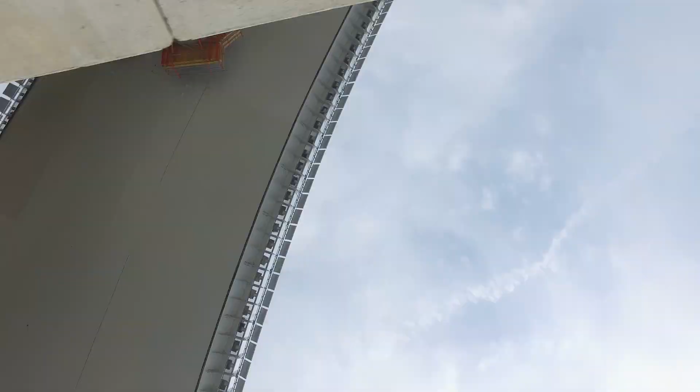But the welcome scene of cars and trucks once again speeding over the Polcevera Valley is a sign that the battered city can be resurrected. The iconic new bridge is not just a symbol of national resilience, but also a tribute to the victims by turning tragedy into triumph.